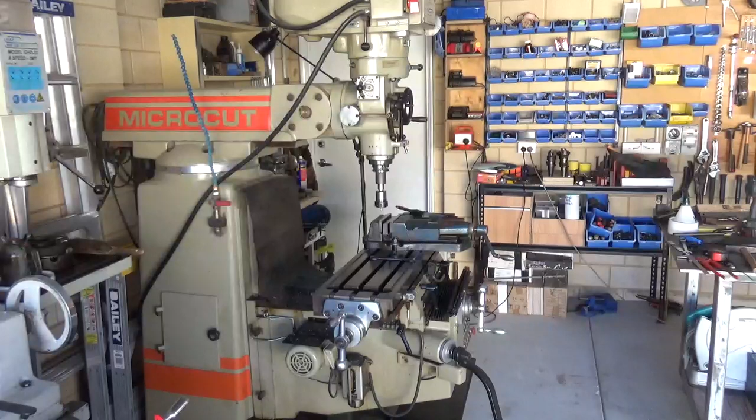Today I have a bit of work to do in order to make a spanner. I had an issue with the spanner on this saw, so one thing led to another. Let me start from the beginning.

See this bundle of pine wood? That was a crate from that little baby. The other day I planed that and brought it into the desired sizes, because I'm going to make a bit of a seat out of that for Mrs. and myself and our daughter, so we can sit outside and enjoy coffee when weather permits. Not like today, it's all right, but there are days when it's cold.

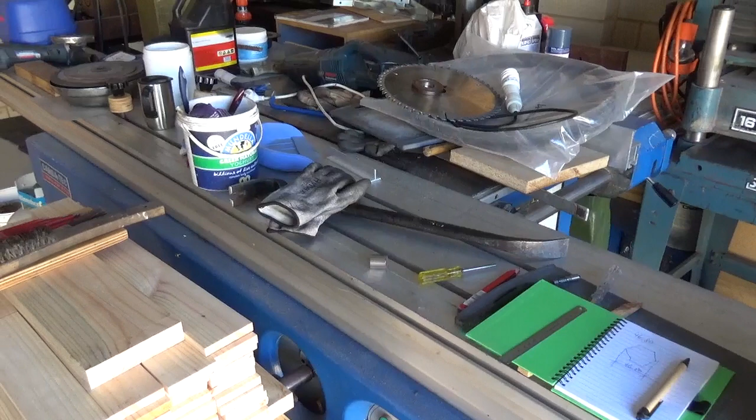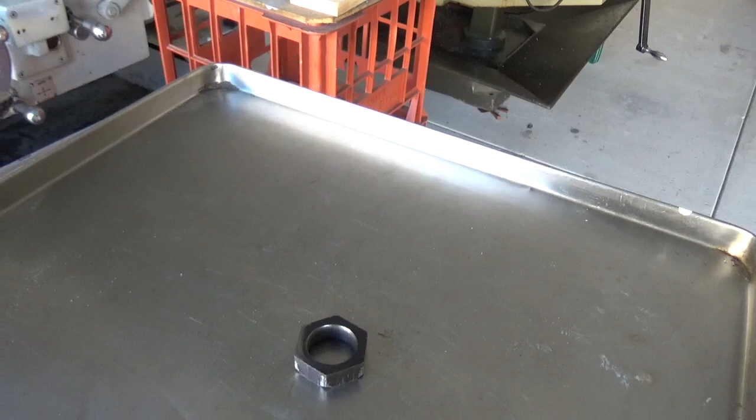Anyway, this beautiful machine, as you can see here, that blade needs to be changed, and in order to change that I have this nut. Because I can't use a wrench - there's a 41 mil nut - and I've had that machine for more than a year now, almost 2 years, and every time I had to change it, I was using a big fat Stilson, and that Stilson has left some marks on that nut, which I particularly don't like.

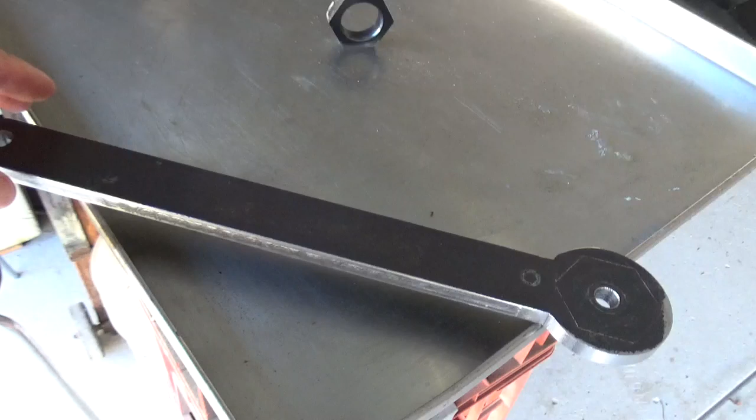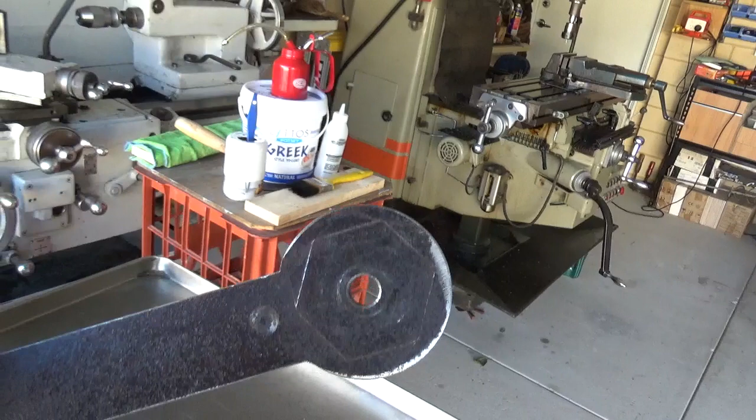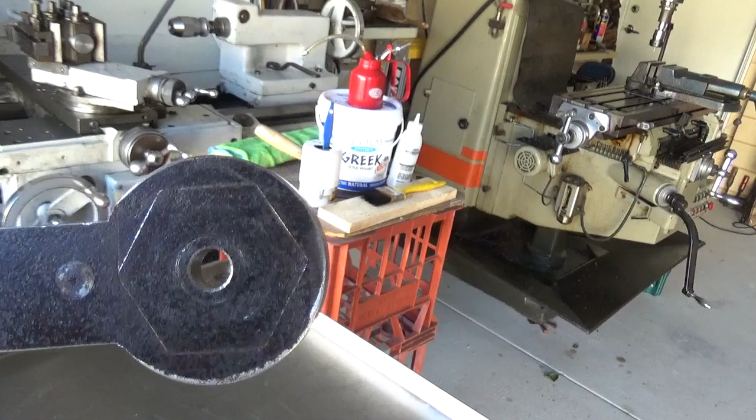So I decided to make a spanner for it. Of course I could buy one, but then why not make one? So this is the beginning. I didn't film how I made all this, because to be honest, I thought I wouldn't make it. But nevertheless, what you can see here - I know this is not a big deal for some of you guys who are professionals in machining. For me, this is something semi-new. I was good within 1 mil, but these days, with these things, you've got to be good within a tenth of a mil or a hundredth of a mil or something like that.

So without any further dwelling, we're going to go into it. I could do it two ways, and I choose to do the old-fashioned way just to see if it will work.

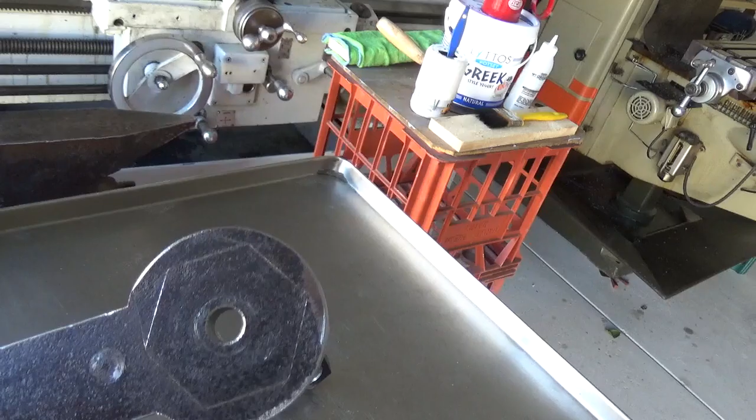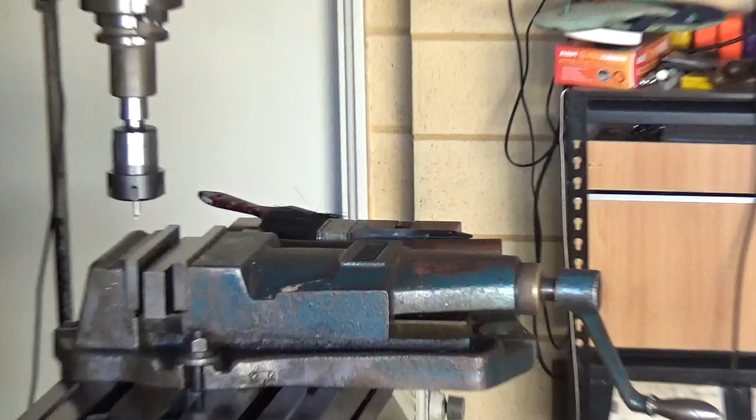So what I'll do now, I'll leave the camera here so you guys can follow what I'm doing, and I'm going to zoom that in a bit - just bear with me.

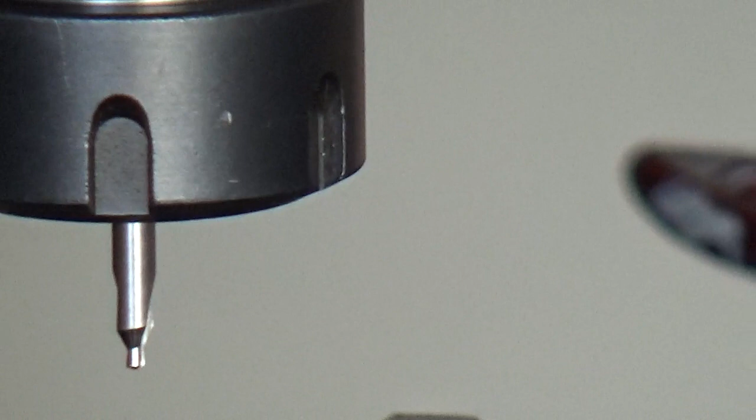I have prepared there a collet chuck ER32 collet chuck. I do have the other one, but I haven't got a small collet for that small center drill, because that center drill is only 2 mil on the bottom and 4.7 I think on the thicker part. Yeah. So anyway, this is what's going to happen.

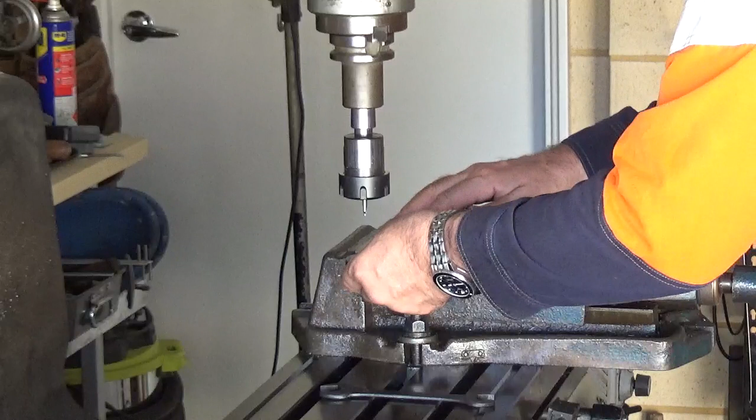I'm going to set all this in and we're going to go from there, and I hope you're going to hear me talking, hopefully. So that's how I'm going to set this up, into the vise. Bottom is not moving, tightening up the vise a little bit better. Like that, okay.

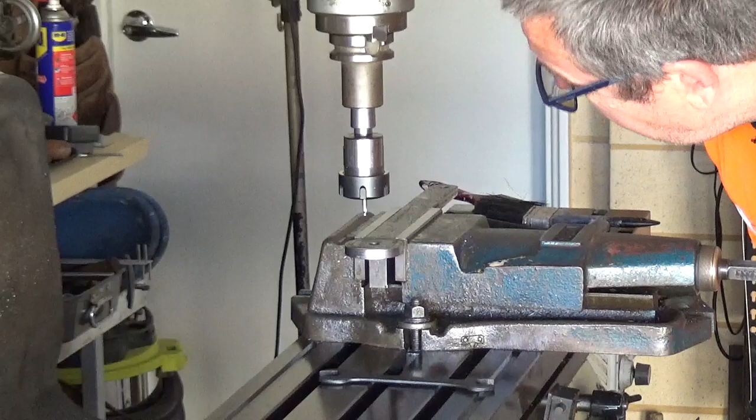So let's come up a bit first. Right, now to find the first hole - I should have done the marking up with the center punch, but I didn't. So what I'll do here, I'll push it to the first hole, and the first hole is this one here. Bear with me.

I'm not sure how well this is going to work, but I need some more light from this end. Okay, so unlock this thing. That's it. Oh, no wonder, no wonder it doesn't want to go. Oh God, I have locked this one up.

I locked this so it doesn't drill more than what I wanted to on the other part which I was making. I just want to start with the first hole, where the first hole should be, and I would say that is a little bit more, something like that.

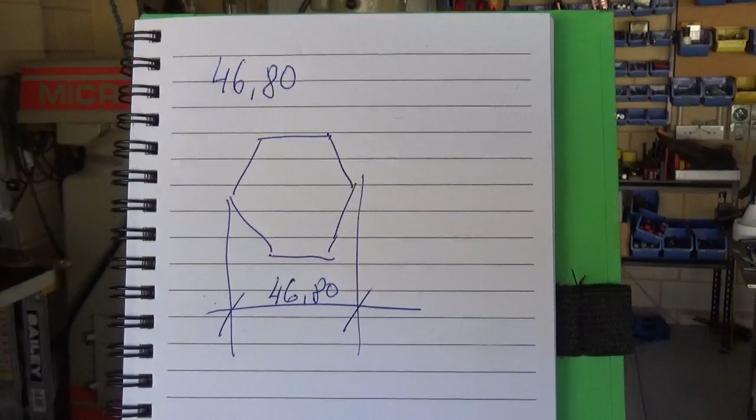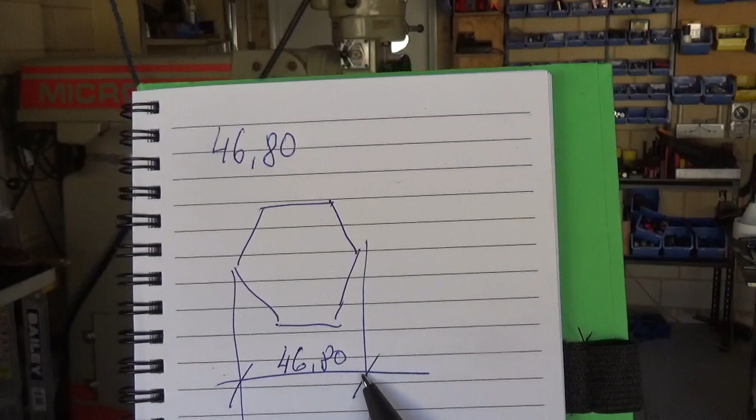Basically, where are we? Just a second. Basically, this is the drawing of that nut, and from the higher point to the higher point is 46.80. So what I'm going to do, I'm going to take out 1 mil on one side and 1 mil on the other side, which is 2 mil altogether.

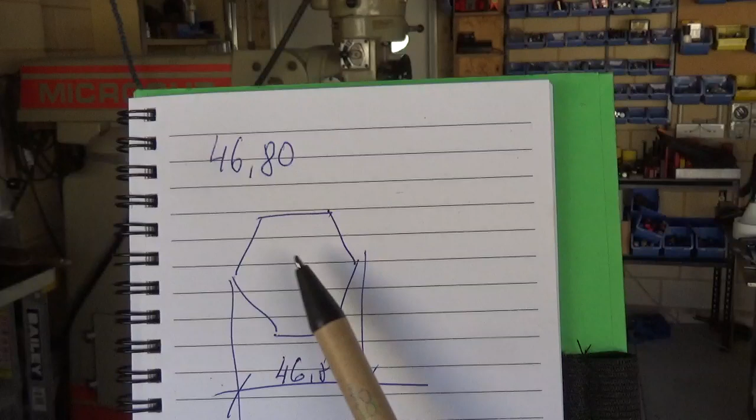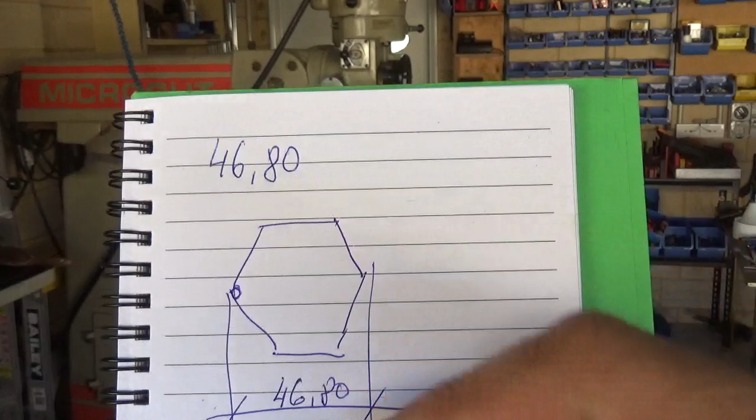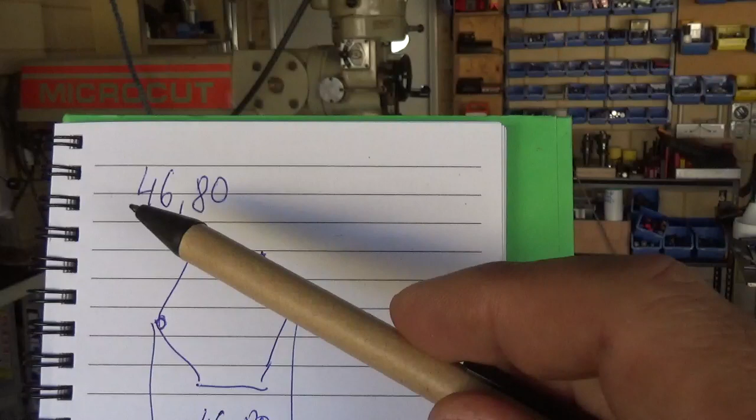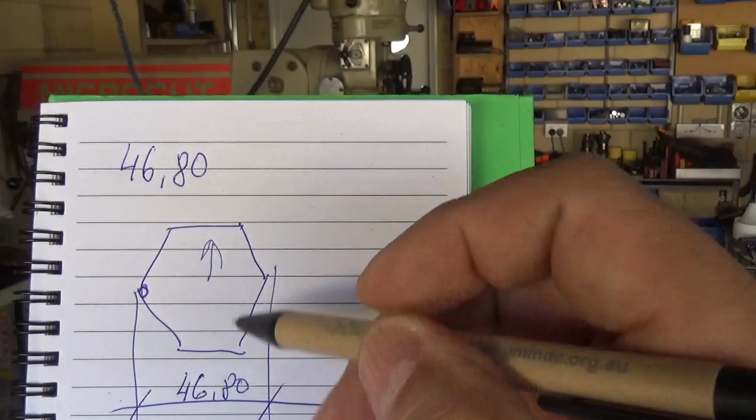So what I'm going to do, I'm going to place the drill right here, in the corner on the edge of the line, and then if something else needs to be taken away, I'll just file that off. So basically I'll drill this hole, then I'll come to this one, then I'll go 23.40 in this direction, like that, and then that's obviously from the center line of this.

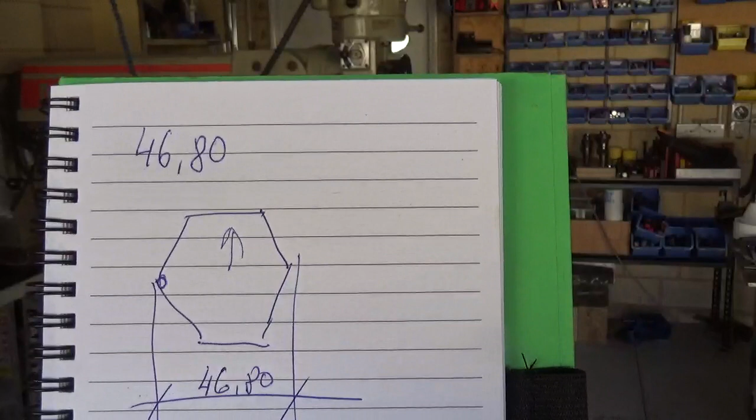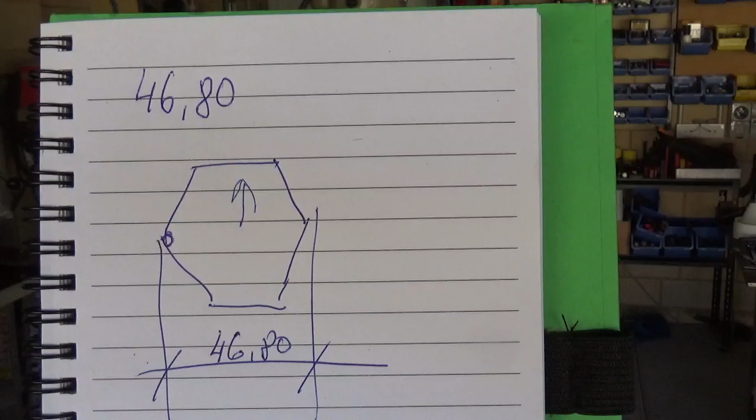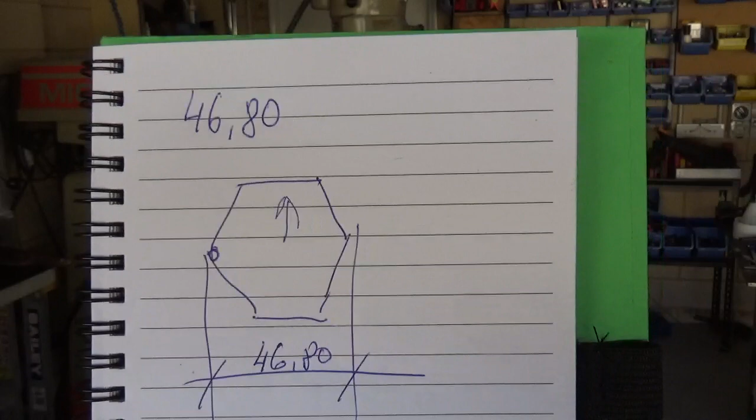Once I establish the center line, I'll establish it on the wheels, zero the wheels and all these things, how that works. So just bear with me a little bit, and hopefully this will work the way it should. In the old days, when there was no DRO, people were doing it this way and they were making good stuff. So I'll probably win, but if I don't, I'll let you know. So just bear with me, we'll go and drill the first hole.

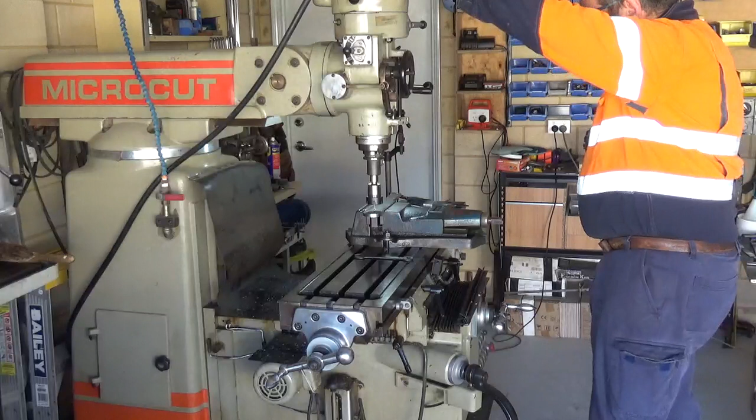That looks alright. Let's do the first hole.

Go a little bit more. That's what I want. Now let me have a look. How's that hole in relation to the line?

I tell you what, any better than that, they would laugh at me. So what I'll do now, I'll zero this side.

There's bugger all backlash on this mill, and one turn is 5 mil, and it's a metric mill. So one spin is 5 mil, and I have to go 4680. Let's push 4680 less 2 mil, because the thickness of the drill is 2 mil, and I want the edge of that thing to be on the edge of the line.

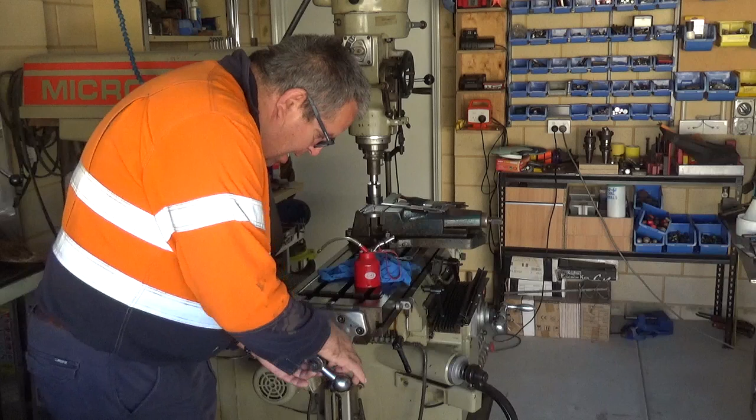44.8, but before that I'm gonna zero it, and that's that. Let's dial on the 0, and I'll lift this sucker up, and hopefully when I wind this one up it should go that way. So let's go.

5, 10, 15, 20, 25, 30, 35, 40, 41, 42, 43, 44.8. It should be here somewhere.

Let's see. Let's see how that looks like. That doesn't look bad. That does not look bad.

Let me measure that roughly again. So in between those two should be 44.80. 43. Gosh. There is something that I'm doing wrong.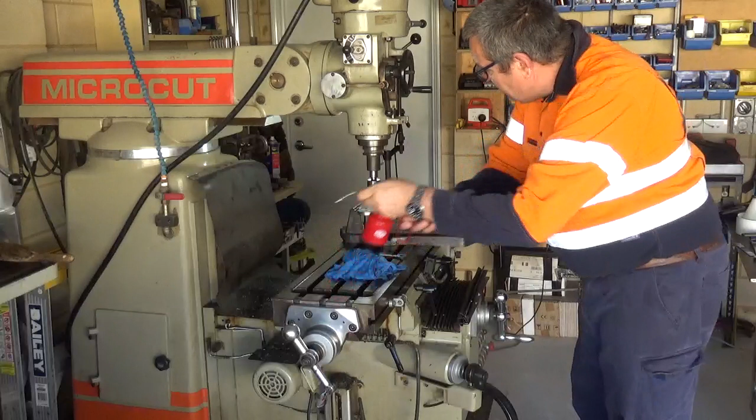Right. Okay, let's see how that looks like. That looks good to me.

So now we have to shift how much? 23... what is 20? Hang on, we have to shift that over, 2340 less 2 mil, 2140. Let's zero this one, and it is on the zero, almost zero there.

2140. It's 5 and 10 and 15 and 20, and then one more mil. Bang. And 40 is roughly there. Does that look any good? It does, it does, 2140. Let's drill that.

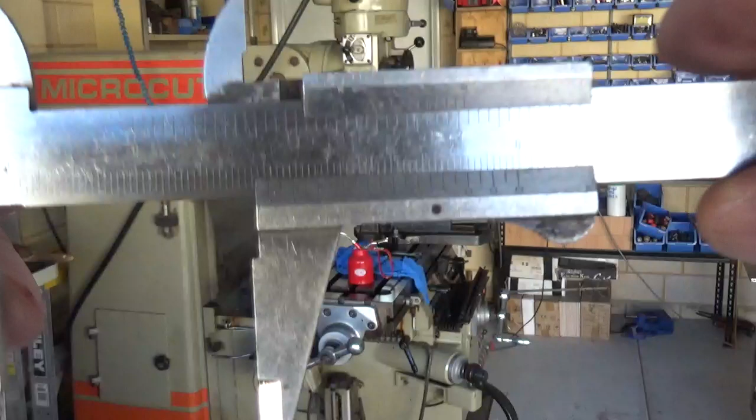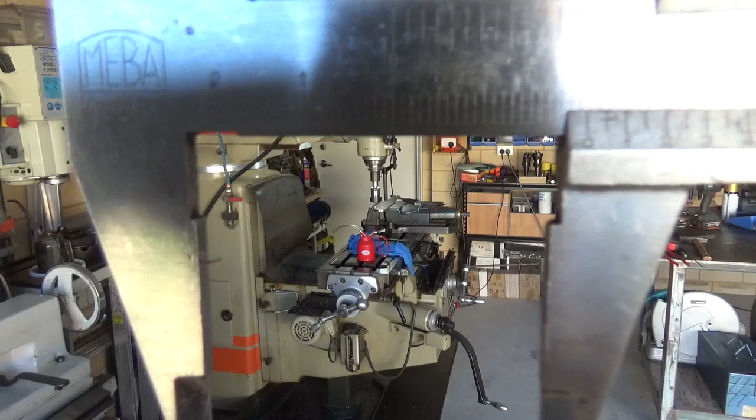Just so you see I'm not bullshitting to you, even though I am a good bullshit artist. So that is, hang on. Look, I can't see that. If I can't see that on the screen, you won't be able to see it on there, maybe there. It is not quite 41, but it will leave me something for the file. So all I have to do now is push this way.

2140, so this one is on 0. So 5, 10, 15, 20, 21, 40, 2140 somewhere there. How does that look? That looks like a charm. Okay.

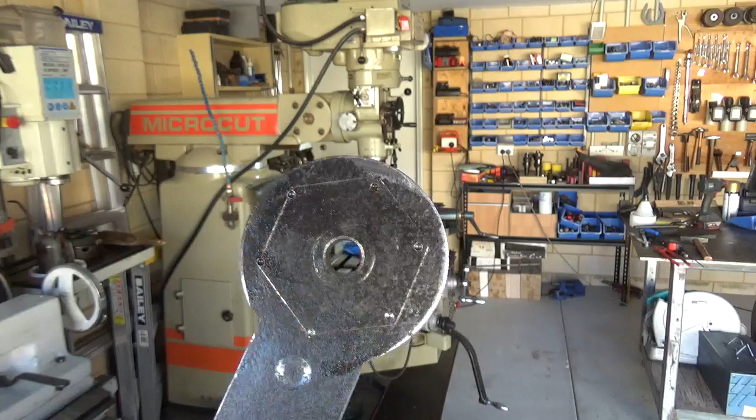Now guys, these holes and these setups, it doesn't really matter. It doesn't really matter. What I try there, I'm gonna take this off, I'm gonna probably - this is what I made so far. I'm not sure if you can see those holes. Some of them are lining the thing properly, but some of them aren't.

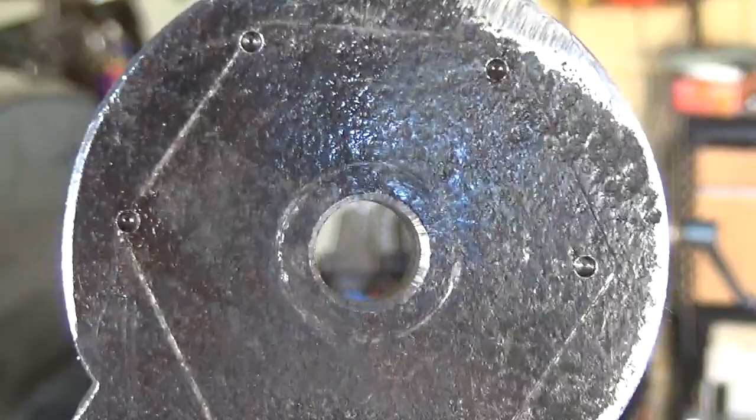See these holes? These holes on this side, they went sort of out of the lines. But what I'll do, I'll take a caliper now and just walk to each of those holes and see how that looks like. Let me put this camera here somehow so you can see what I'm trying to achieve. And then if that business doesn't work, what I'll do, I'll probably do it again on the other side, differently. So caliper is here.

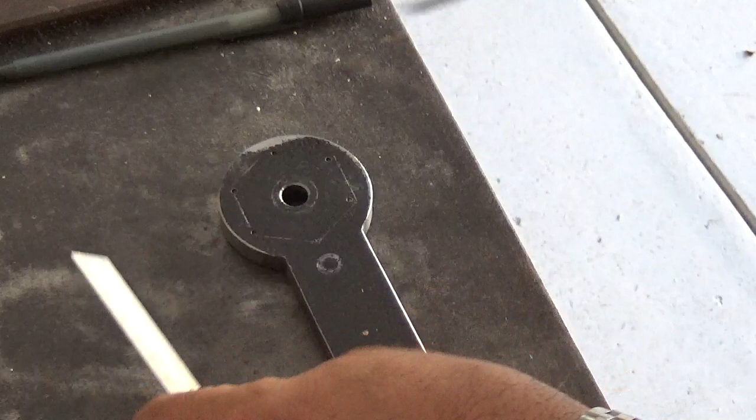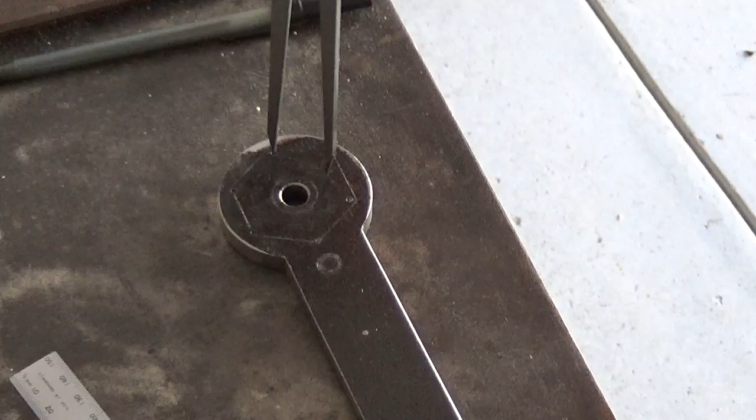And it is set to, let's go from the 0 to 23 and something. This is all rough, I was always within a mil in my work, but see, this is not good, not good at all. This is bigger. This is somehow there, but this isn't. All those holes should be equal distance one from another, which they are not.

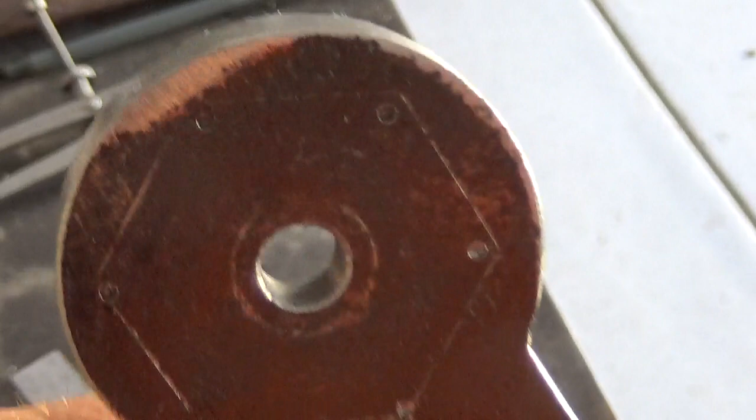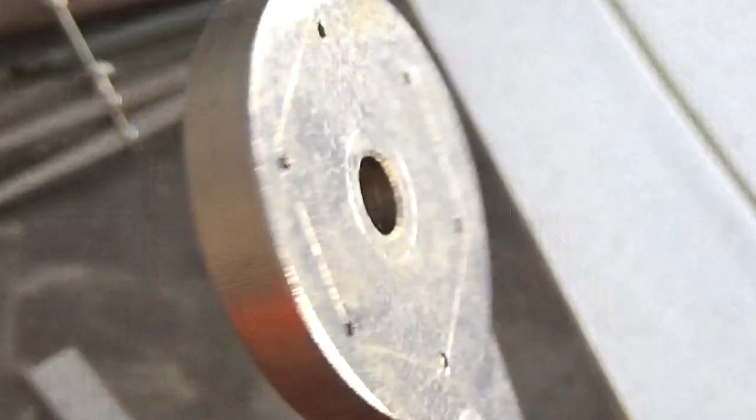So that's failure, that's failure. So guys, I'm gonna wrap up on that one, and what I'm gonna do, I'm gonna put that thing into dividing head, because I thought I'm gonna win on that one, but as you can see, I haven't, because it's not much - that can be muscled with a file. I could muscle all those things with a file, but I don't want to do that. So what I'm going to do, I'm going to turn the thing around, there's nothing on the other side. I'll probably make a proper video about setting the dividing head and doing that with the dividing head.

Until that happens, I wish you guys all the best, and forgive me for not succeeding. I'm not happy with this, this is not the way it should be. It could have been done, it could have been fixed this way, but no. Let's do it properly. This is all by eyes and way of eyeballing, but mind you, I have square eyes, and my square eyes are proven now they are not that good.